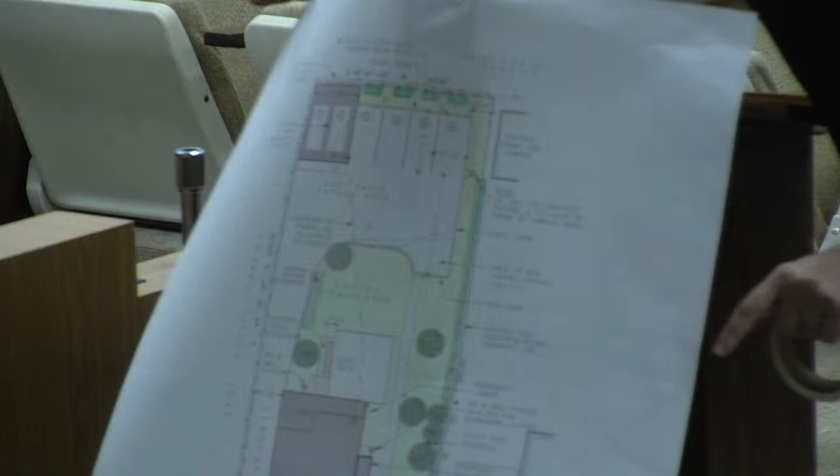Yeah, okay. Can we see that okay? Better? Okay. So why don't you discuss the site plan for the board? Yes. What's existing, what's proposed?

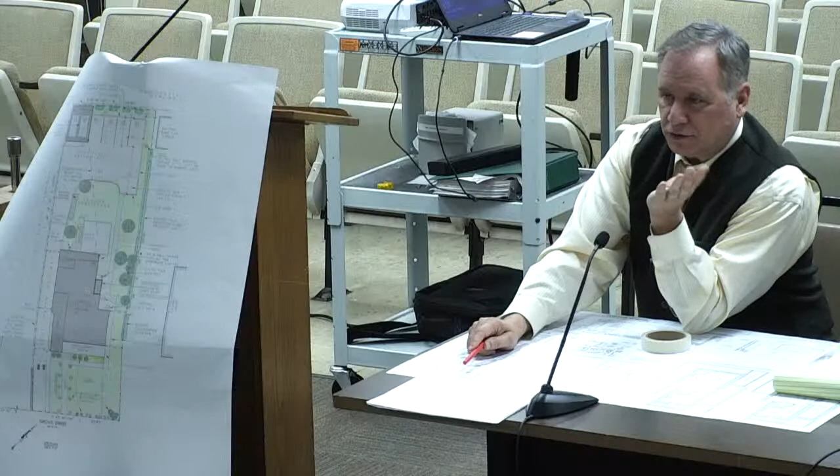Okay, as stated previously, there's a driveway on the westerly side of the property that runs from the street all the way back. And there is an existing two-car garage. And there's parking to the right of that. Currently, the parking is just haphazard. It's not really striped or anything. So we've created 4 9-foot wide spots in that available space, and we maintain a buffer against the neighbor as required. In addition, there are 4 planter boxes along the back, which the DRC recommended we move back in order to get the cars pushed in. So we did that, and now the car depth is over 19 feet. So that constitutes 6 parking spots, which meets the requirement for what a 3-family would require.

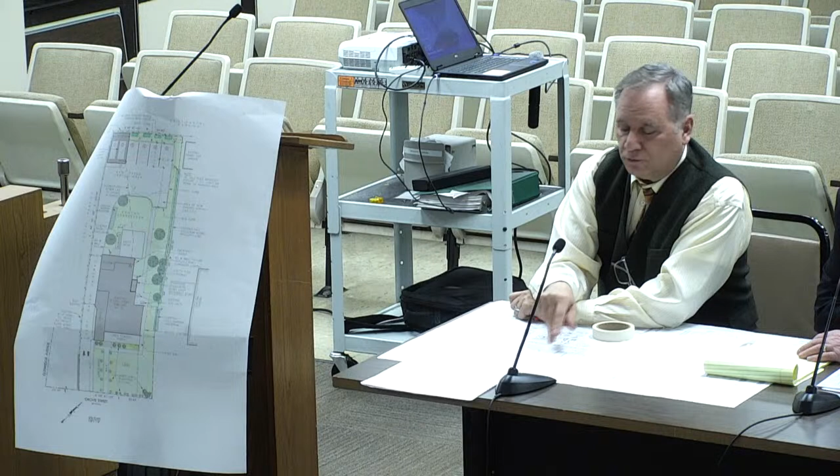I mean, the 4 spaces you're showing plus the two-car garage. Two-car garage, and those are the spaces that are slightly undersized by, I think, 4 inches per car. Okay. That garage is existing, correct? Yes, it is. And is it currently used to park 2 cars? I think so, yeah. I've seen cars in it.

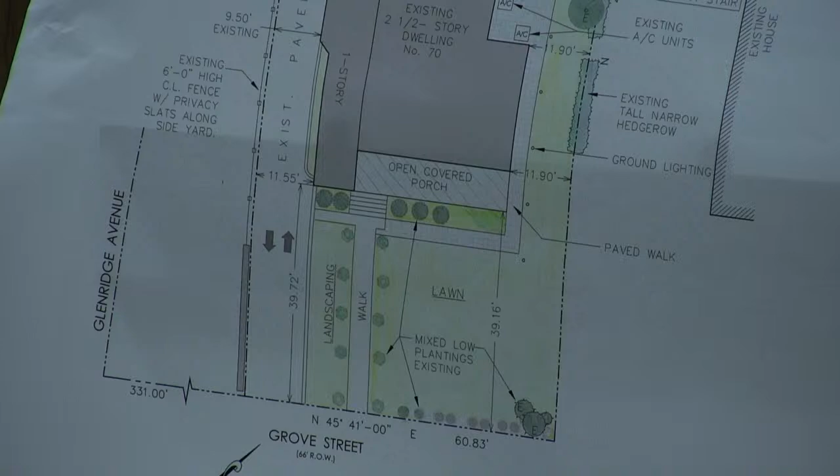Okay. So anyway, the only really new construction entailed in this is on the easterly side of the property. There is currently an existing concrete stair going down to the basement, and we would be constructing an enclosure of that stair, because it would rain down there, obviously. So we would construct an enclosure and a small roof. It's a small enclosure, just a simple shed roof. There's an illustration of it at the bottom of the page where it says elevation. You can see new stair enclosure, with a simple shed roof there.

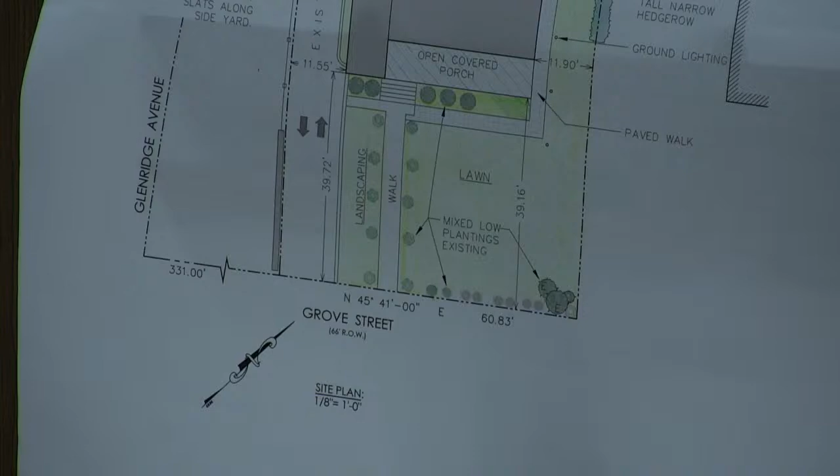And the only other construction is a slight amendment to the parking area, like a spur, so the cars could back up and then get out. This way, they don't have to back out of the driveway, they could drive out frontwards. And that is at the easterly side of the parking area. Those are the 2 things that involve any kind of new outdoor construction.

Finally, well, let me just say that we're not proposing any trees be cut down, and the property is fairly well planted. It's very lush, and so we're not proposing any new bushes or trees either. It's pretty well covered over in many areas, so that will remain unchanged.

We require a covered trash enclosure, which we show just adjacent to the existing deck. You can see it on the plan, just off the driveway. And that would be just a covered 4-foot by 12-foot enclosure, made of the same material as the deck, so it would match the deck, actually.

And finally, the fire escape. That is required because the one apartment requires a second means of egress. So it's not really a fire escape. There's a roof right there at the window. All we're doing is paving over the roof, making a platform and a ladder down. It's not a fire escape in a normal sense where you have a landing and steps and a landing and steps going down. This is just simply a little deck with a drop ladder right there.

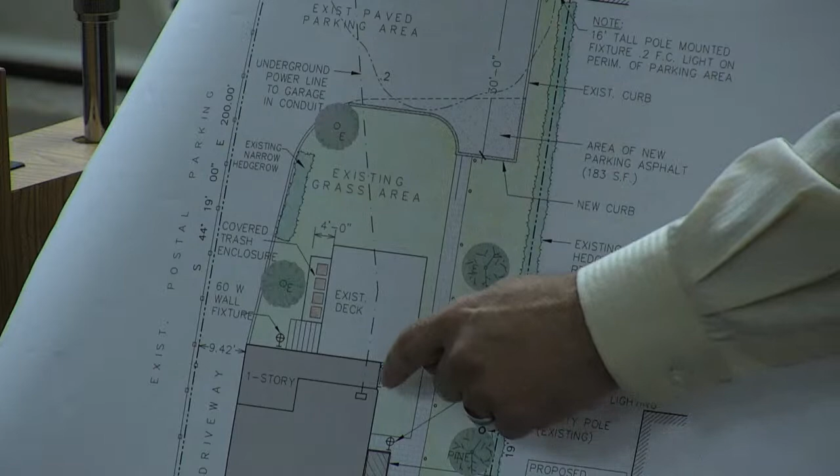Can you just show where that's located, using the plan that is on the easel? That is located here, right there. That semicircle is the cage that is required around such a ladder, so people don't fall back. It's a safety thing. So that's where we have to bring that corner. So as you can see, the building itself blocks the view of it already, plus all the tall vegetation, you really wouldn't even see it.

I believe that's it. Like I said, the property's pretty greened over, and the amount of impervious coverage only increases by 183 square feet. That's due to the increase in the driveway to allow for maneuvering. Yes, the DRC recommendation, so to do that, we had to increase it, and that's it. Okay, and again, just to be clear, the only exterior change to the existing building is the enclosure over the basement stairwell. That's correct, yes.

Okay. Just a couple of follow-up questions, John. On the parking spaces, just want to be clear, the 4 surface spaces, marked 3, 4, 5, and 6 on your plan, they're all 9 feet wide? Yes. And you're showing them as 17 and a half on the drawing, right? Yes. Okay, but by pushing the planter boxes back, you now have an overhang. Would there be at least 2 feet? Okay, 2 foot overhang, so it's 19. So those spaces would comply with the ordinance, correct? Yes. And the garage spaces essentially don't comply because of the width? Yes. Depth is okay, but width is a little tight. Okay, all right.

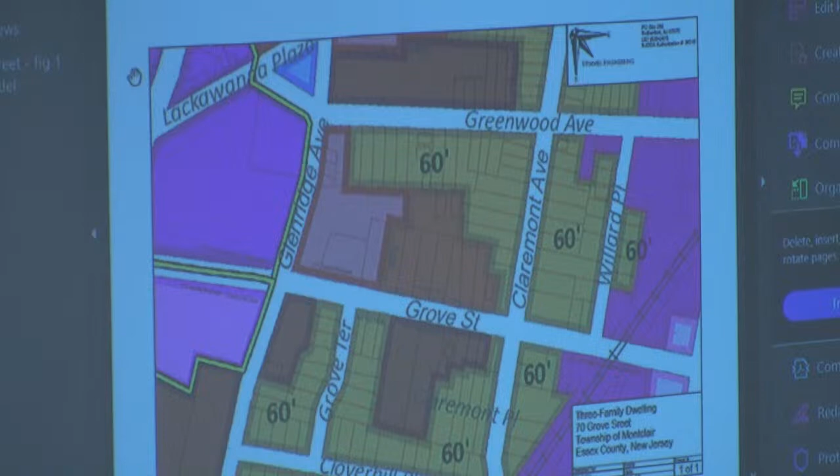As I noted, the site is located in the R3 Garden Group zone. The proposed use is a conditionally permitted use in the zone according to Ordinance Section 347-54, subsection B, which states that an existing principal residential building may be converted to provide more than 2 dwelling units for use by more than 2 families, provided that the entire building, when so converted, shall comply with the requirements of the building code applicable to newly constructed multifamily dwellings in the zone, and provided further that there are 7 conditions for this particular conditional use.

The first condition is that the floor area of each dwelling unit shall be not less than 800 square feet. The 2 existing units and the proposed unit are all over 800 square feet, so we comply with that requirement.

The second standard is that the principal building on the lot shall occupy not more than 1/4 of the ground area of the lot. We comply with that. The building coverage is 15.9%, so it's well below the 25% that's permitted.

The third standard was repealed. The fourth standard is that the ground coverage of the building, exclusive of open porches, garages, or other area not within the area occupied by normal living quarters, shall be not less than 1,250 square feet. We comply with that requirement.

It goes on to state that the area of the lot shall be not less than 15,000 square feet within 150 feet of the front street line. The area of our lot is 12,203 square feet, so that's one of our deviations from the standard.

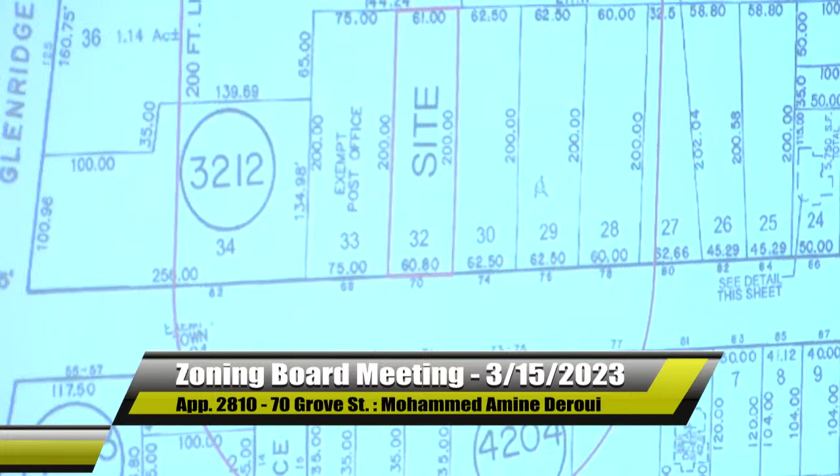So the existing lots - the subject property is 60.8, 62.5, 62.5, 60, 62.66, 45 and change, 45 and change, and then 50. So obviously they're below the required width and size. I would expect that some of those have been grandfathered in, when the master plan was redone, that they looked at these buildings - as you noted, they are 3 families, 2 families, etcetera, a mix of some sort of use.

Correct. But my question to you is, this R3 zone garden - when I first looked at it, I thought, oh, maybe they're looking for people to convert their garden or basement into another residence. But when you look at the square footage, it specifically wants them not to be under 1250, and we're close to that. I agree, but I just want to pick your brain on what you think the reason is - is this zone misinterpreted here, or?

I'm always hesitant to try to read the minds of the municipalities when they adopt ordinances and master plans. I think it's possible it was looking at bigger buildings on bigger lots, and didn't contemplate a section like this with the existing land use pattern being what it is - where this site, although short of some requirements, does meet the majority of them and appears appropriate for the type of use proposed. So it's hard to say what the members had in mind when they adopted the ordinance.